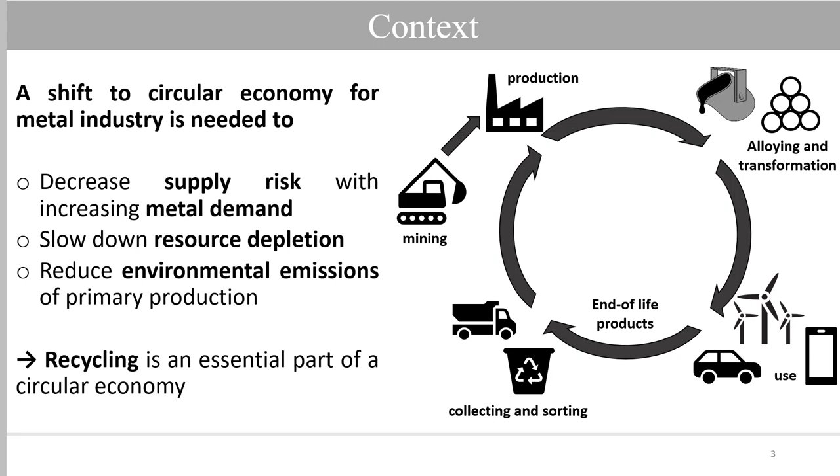This is not only for the decrease of the supply risk. It is also important to reduce the environmental impacts of the primary production of metals, such as resource depletion or degradation and environmental emissions of harmful products. As you can see from the scheme on the right, recycling is a really essential part of circular economy if we want to decrease the impact of mining.

So one important tool in circular economy is Lifecycle Assessment, which is the methodology that is used to assess environmental impacts that are associated with all the stages of the life cycle. Why we are interested in all stages is because if you are just focused on one step of the value chain and you're trying to minimize its impacts, you may simply be displacing the impacts elsewhere, and overall the efforts that were made are pointless.

The one limit of that approach, or the current databases that are available, is that no data is available for under-development processes. And this is problematic if you're, say, a company that is trying to develop a new process for recycling or for production, and, in addition to your technico-economical analysis, you want to assess the environmental impact of your process because you want to comply with, let's say, environmental regulations. This will be made difficult using those tools without any data for your new process.

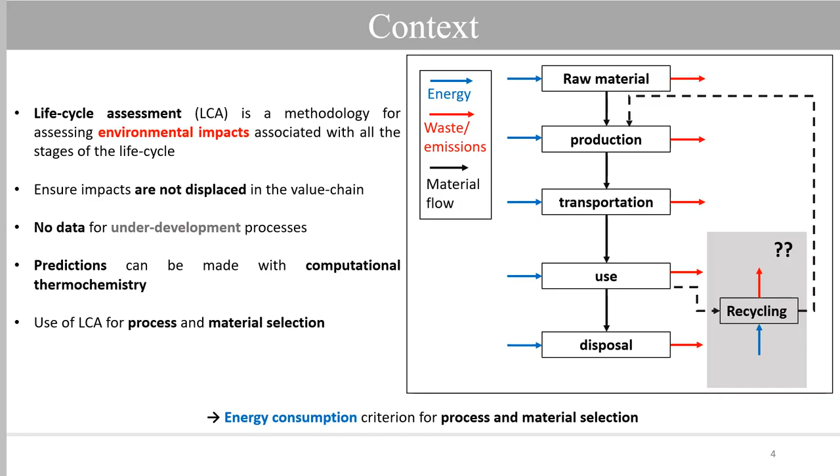Thankfully, some predictions can be made with computational thermochemistry through the use of mass and energy balance. And the hope here is that we can use lifecycle assessment for process optimization at the design stage and material selection in the product conception stage. In the scope of this project, the energy consumption will be used as a criterion for process and material selection, but please be aware that this is not the only one that must be taken into account.

So the methodology used in this project is basically we do a literature review of all the real energetic requirements for production processes, and you can see an example depicted on the right, a typical pyrometallurgical route for metal production. And once we get all those requirements, we make a comparison with theoretical calculations that can be performed with FactSage.

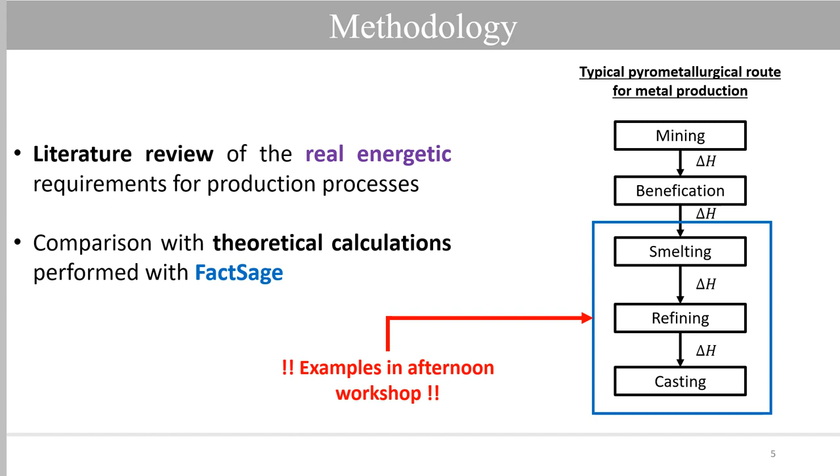A few examples of those will be displayed in the afternoon workshop for both primary production and recycling processes. So the goal here is simply to make sure that the theoretical calculation can be used to make pertinent predictions in terms of life cycle assessment methodology.

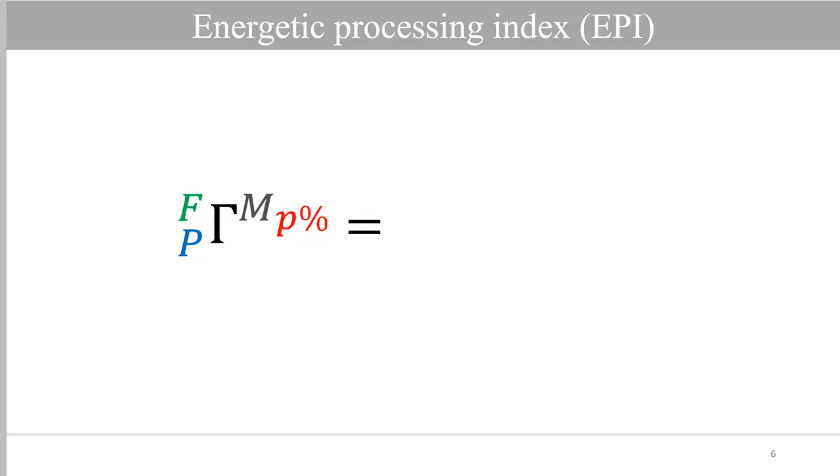One aspect of the project is to define a new index for materials, which is the energetic processing index. So it looks like this. It's a gamma FPM. And it looks scary like that, but this is simply inversely proportional to the cumulative energy demand for the production of a metal.

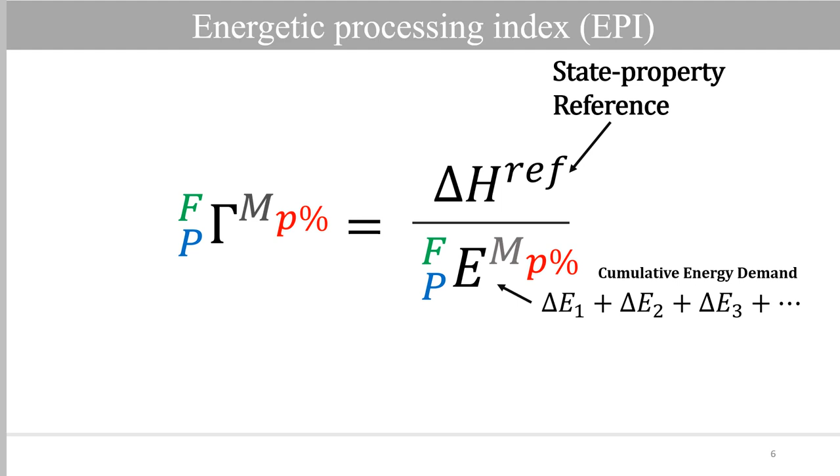To make it unitless, we simply divide it by a state property reference that is unique, and therefore it ensures that comparison can be made, and we can always retrieve the cumulative energy demand. What's important about this index is it's specific to a metal, so we can make comparison between materials. The purity index is really important for further analysis, as will be shown later.

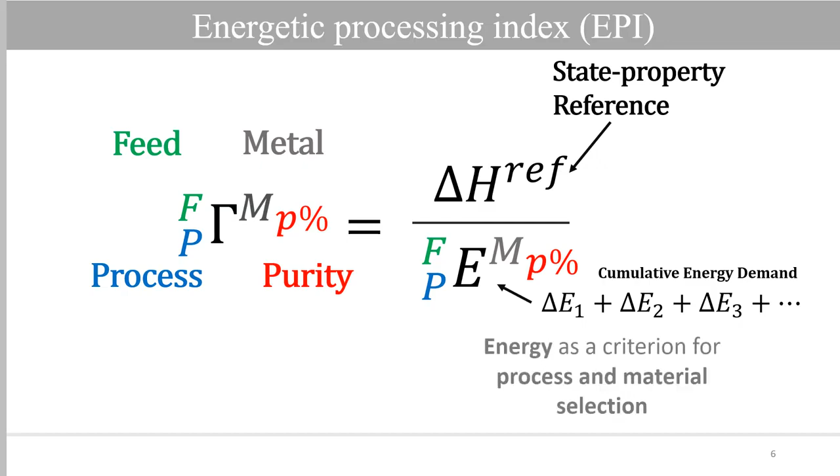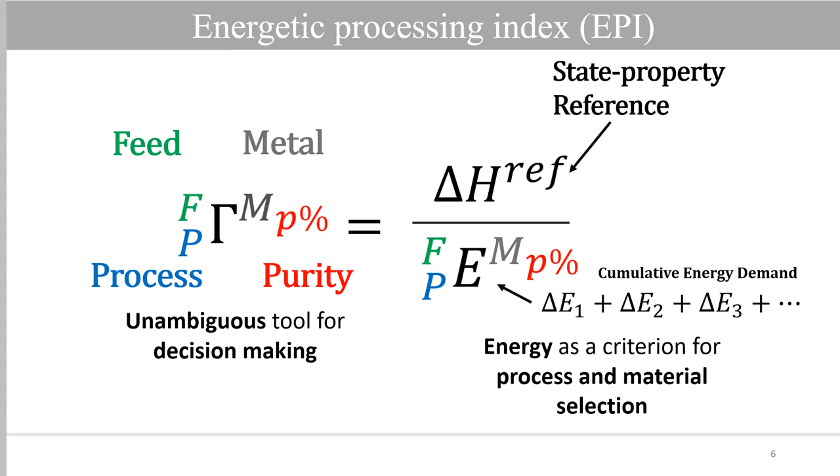And this is dependent on the feed that is used to produce a certain metal. And of course, the process that is used is going to have an impact on the energy demand. So energy, as I said earlier, will be used as a criterion for process material selection. And most importantly, it is an unambiguous tool for decision making, as all the parameters are here to ensure that we have all the information that is needed for fair comparisons between materials or between processes.

And in order to make a fair analysis, we need to know the purity of the metal that we want to recycle to make sure that we're not trying to replace a metal with something that is actually downcycling, and this analysis doesn't stand. So this is important. If we were to use the energetic processing index, we would know the purity that is targeted, and this would change the whole analysis.

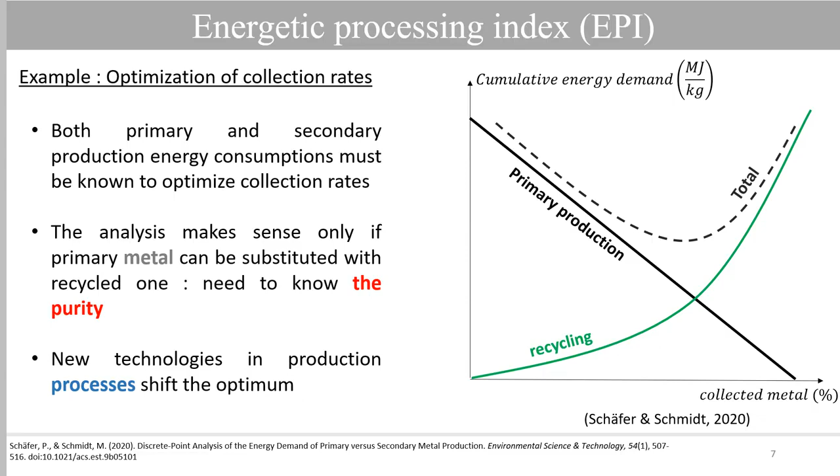Also, it is important to know, of course, the production processes that are used either for primary production or for recycling, as new technologies can either decrease or increase the energy demand and can therefore shift the optimum to the left or to the right, depending on which process is optimized.

Another use of the energetic processing index would be its incorporation in a multi-objective function through a methodology that was originally proposed by Ashby for the selection of material. So you would have an objective function that comprises material properties such as density or tensile strength that are submitted to fit certain constraints depending on the product that you want to develop. And what will be interesting here is to add the energetic processing index for the material that you're considering.

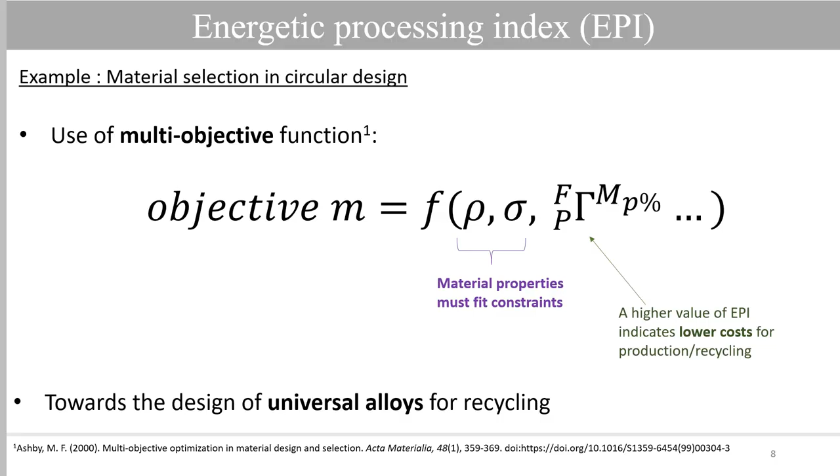And you can evaluate, for example, its cost through the energy demand, which is a part of it, or evaluate its recyclability if the process that you're considering in your index is recycling, of course. So this would also go towards the design of universal alloys for recycling, where we can optimize the composition of the alloy to fit the objective that we fix for this material, and to ensure, for instance, that we have somewhat homogeneous composition so that materials can be recycled together and to promote closed-loop recycling.